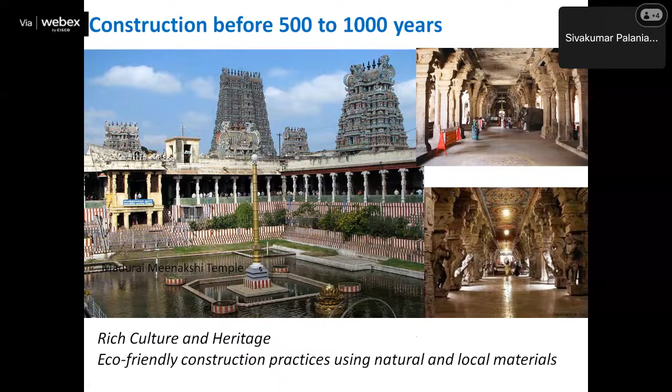Historic temple, Meenakshi temple, and these are other temples in southern Tamil Nadu. These were built using eco-friendly construction practices, using granite stone, more natural and local materials. So this was how the construction industry was long ago, heritage buildings.

Whereas if you consider the traditional housing projects in southern India, you can have a house like this with a central courtyard, which permits ample daylighting and ventilation into the house. There is rainwater harvesting facilitated in the house. So it's more kind of seamlessly living closely with nature in a setup like this.

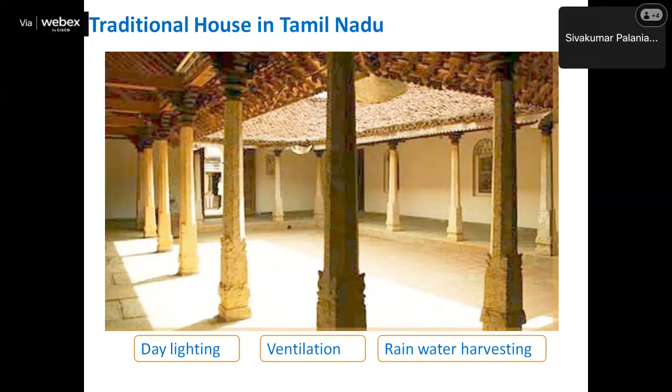Whereas if you consider the modern construction practices, we often go for high-rise residential buildings, commercial buildings, and one of the concerns is we do spend more energy for operating the buildings. Typically, the service life of the built environment is about 50 to 100 years, and a significant amount of energy is used for periodical, day-to-day operation of the building in terms of lighting, ventilation, services,

air conditioning, and so on. So one of the questions I would like to discuss with the audience is how do we align the modern construction practices with the traditional principles and culture, so that we live a more eco-friendly life and reduce the impacts on the ecosystem. This is a question all of us need to think about in the coming years if we really want to move towards net zero.

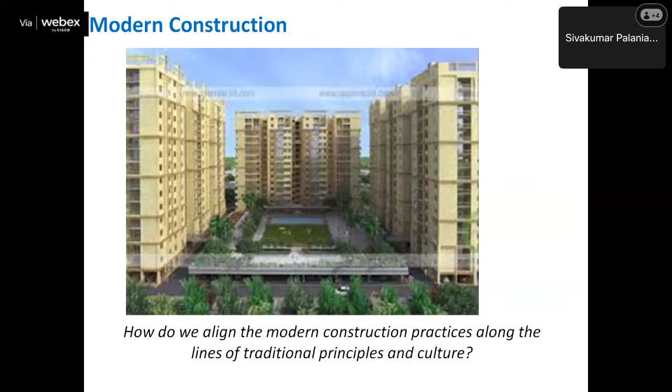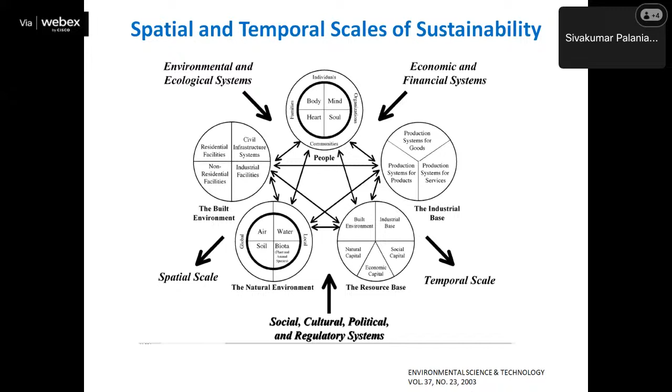Now, there are different perspectives related to sustainability. In addition to the three pillars we have discussed, we do need to consider the temporal dimension. How does sustainability vary across the time scale? We do need to consider the spatial aspects. What is the effect of geographical location on sustainability metrics related to the built environment? So this is relevant for us.

On the global vision for built environment sustainability from a civil engineering perspective, I would like to share two key concepts from this figure. One is how do we move from a non-renewable natural resource to a renewable natural resource? Moving to renewable power sources is very important from a sustainability perspective.

The second is, at the end of life, once a building is demolished, how do we recover useful resources from the built environment and use them for product manufacturing? Thereby we are trying to connect the end of life back to product manufacturing, which will have two benefits. One is we are reducing the amount of waste that goes to landfill. Second is we are reducing the mining operations for new resources. So resource recovery and circular economy along with renewable sources for the built environment will help us move towards net zero goals in the future.

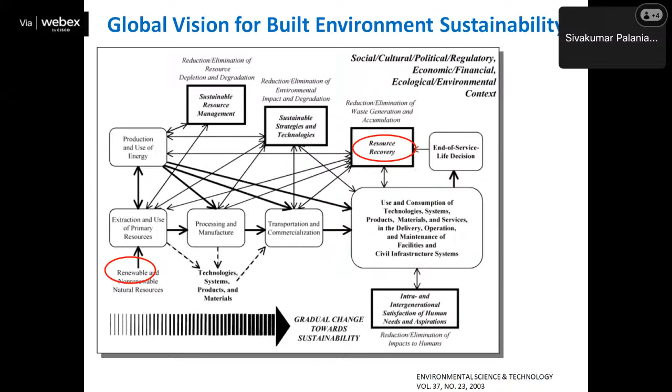I'd like to highlight one example from our own campus, IIT Madras. We have a residential building, a 2-floor building, made of glass fiber reinforced gypsum panels. The GFRG panel is manufactured from gypsum waste produced by the fertilizers industry, and we use that as a useful resource in the built environment. So this is one example of circular economy, where we are trying to connect the waste generated from one sector as a useful resource for another sector. So this is a perfect example.

This photo shows the landfill gypsum waste near the fertilizers industry, and the photo below shows a cross-section of the GFRG panel. As you see here, you have both an interior surface and an exterior surface. In between, you have cavities. These cavities are used either for services, or the alternate cavities are filled with concrete to increase the stability of the GFRG panels.

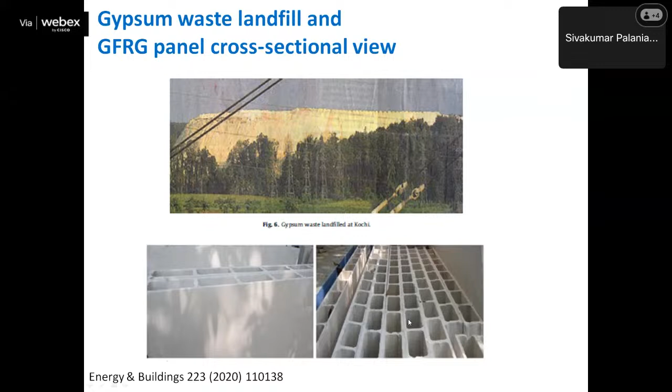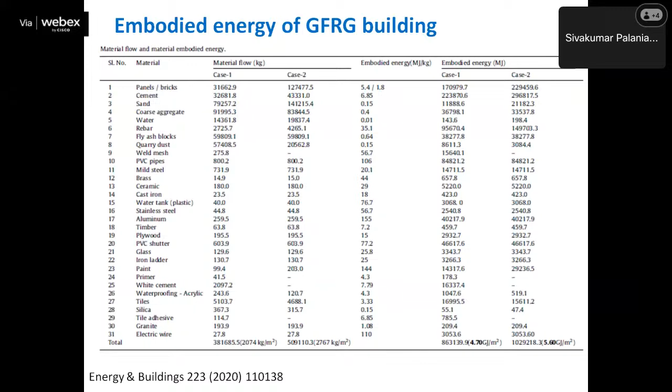In our department, we have conducted several sustainability studies, and one study completed by our former doctoral scholar assessed the embodied energy of conventional residential buildings and GFRG buildings, and compared the differences between both. Here are the key benefits of using this technology for residential buildings. First, we are able to reduce the self-weight by 25%. Cement is reduced by 25%. The use of steel rebar is reduced by 36%. Sand is reduced by 44%. So these are savings from a material perspective.

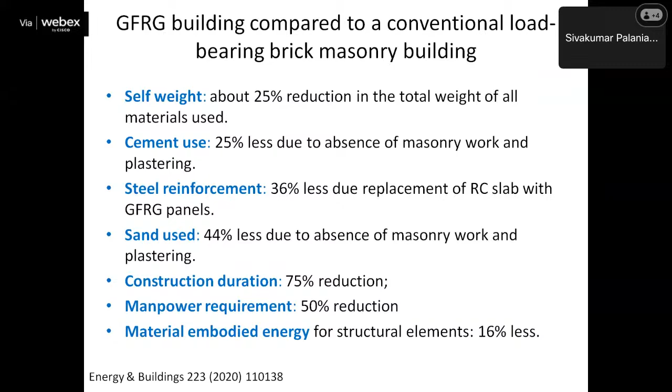In addition, because of the use of prefabricated panels, we are also able to reduce the construction time by 3/4, the workforce requirement by 50%, and there is some reduction in the material embodied energy also. So these are some benefits of prefabricated technology, especially when the prefabricated panels are produced from waste generated by another sector. So this helps us move towards sustainability.

So to summarize, if we want to promote sustainability from a strategic perspective in the built environment, in building planning, design, construction, operation, maintenance, and the end of service life, we have to consider three perspectives. One is what, second is with what, the third is how.

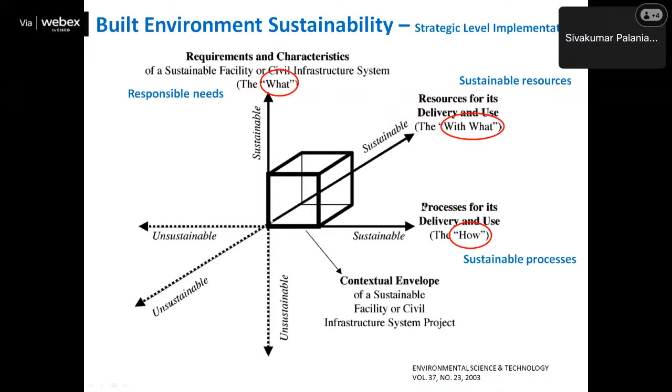First refers to the requirements and functionalities of the new project. So there is an emphasis on making our needs more responsible. Do we have a sustainable requirement for the new facility? Second is with what refers to the use of sustainable resources, how to use materials and technologies with low carbon, low emissions, and low waste. The third is sustainable processes, how to green the construction processes, to reduce the amount of energy used. So this is more sustainability from a strategic perspective.

Now, I would like to give the basics in terms of life cycle energy use in built environment. So a typical building life cycle has these four major phases. First, we consider manufacturing of materials. This is often called A1 to A3 in the international standard. Then follows the construction process at site. So here A4 represents transportation to site, and A5 refers to on-site construction by the contractor.

The third phase is B1 to B7, operation of the facility as well as the maintenance, repair, renovation of the facility. And then finally, we have the demolition and dismantling of the project. This is called C1 to C4, demolition, transport, and landfilling of waste.

So there are different terminologies related to energy consumption in the built environment. The energy used for materials manufacturing is called indirect embodied energy. The energy used for direct construction at project site is called direct embodied energy. The sum of both refers to the initial embodied energy. The energy used for the operation phase is called operating energy, and then the energy used for maintenance and repair is called recurring embodied energy.

So in some buildings, the recurring energy is less than the initial embodied energy, whereas in other types of buildings, the recurring embodied energy is several times higher compared to the initial embodied energy. So this is something to look into from the building planning perspective. The energy used for demolition is called demolition energy.

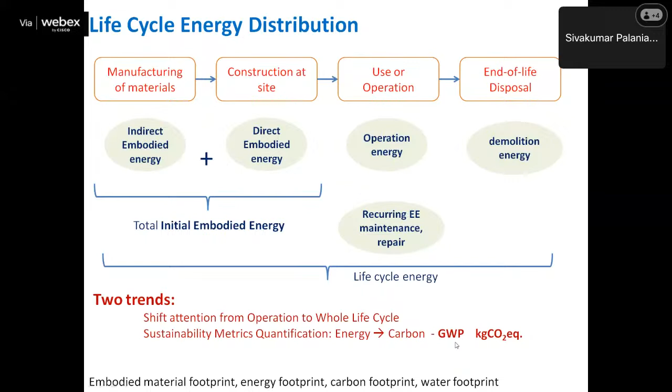So life cycle thinking is very important to promote true sustainability in the society. This calls for considering the entire life cycle of the built environment, starting from the mining of materials, manufacturing, transport, construction, operation and maintenance, repair and renovation, and demolition. And then we do have recycling, which is connected back to the manufacturing.

So to achieve net zero by 2070, as per the government of India, we do need to consider life cycle thinking to understand the true sustainability of new technologies. For example, insulation technologies, solar PV, glazing, EV vehicles, finishing materials, services, envelope and facade. So when we select a new material or a new technology in the context of net zero, it is important to consider the entire life cycle related energy use, emissions, and impacts, so that we make an informed choice in building planning.

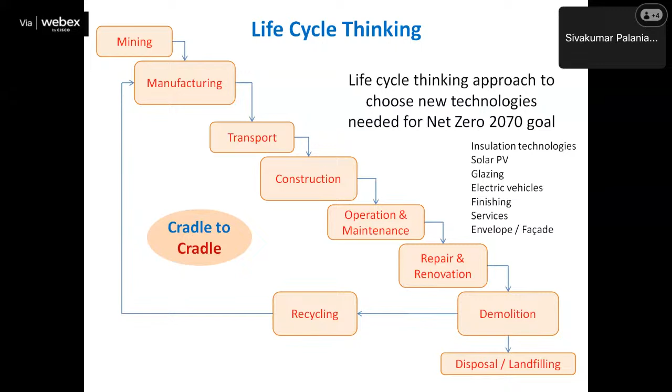Also, the construction industry today is more global in nature compared to earlier days. We do have global construction supply chains where resources are mined from one continent, processed in some other country, and used in developing countries like India. So there is a significant amount of supply chain impact in modern construction practices, especially if you see the mega projects, infrastructure projects, where we have high level of interdependence among multiple stakeholders.

We often import materials, we often import new technologies from Europe and America. So one of the questions we would like to think is, how to optimize the global supply chain related impacts in the context of net zero by 2070.

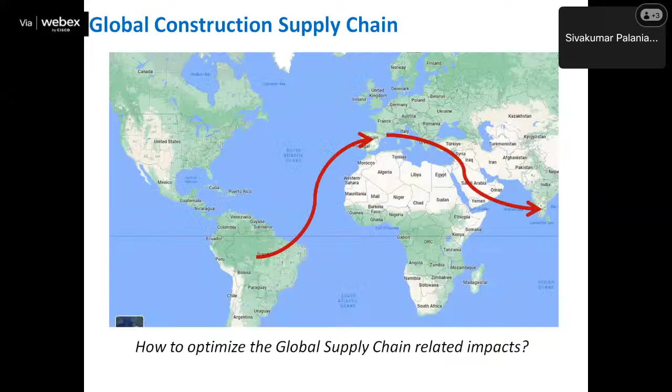The related concept is development of embodied energy databases for developing countries, emerging economies. So this is a snapshot from a database from UK, where they have systematically compiled the embodied energy and embodied carbon of different materials. The availability of reliable data on embodied energy and embodied carbon for materials, technologies, and construction processes is a prerequisite to move towards sustainability. So I'd like to highlight that the technical specifications of materials significantly influence the energy intensity, carbon intensity of new materials.

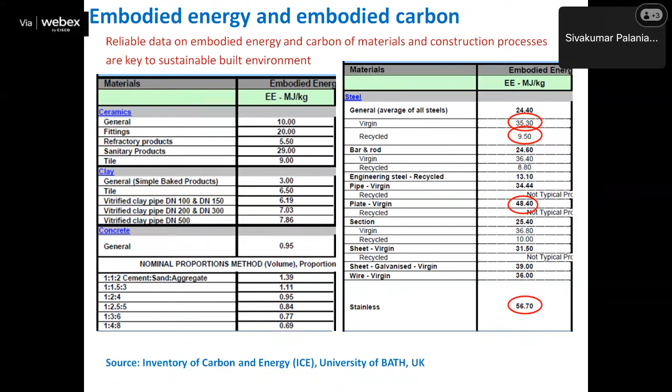So you can see from this snapshot the difference between a recycled material and a new material, for example, stainless steel. The difference is significant. So whether the material is recycled or not has a huge influence on the energy intensity and carbon intensity of the new buildings to be built. The other examples, there are highly energy intensive materials used in built environment.

For example, you have glass, insulation, carpet, lithium. If you see mega projects like airport projects in India, we do use carpet for flooring. So you can see here, carpet is one of the energy intensive materials compared to glass or compared to cement or brick. So this is something we have to consider, how to use less energy intensive materials in the future, especially when we go for mega projects. We have to consciously avoid using energy intensive materials like carpet.

And also we can see lithium is one of the highly energy intensive materials. This is used for EV vehicles, like EV two-wheelers and cars. So we have to pay attention to the energy intensity of batteries, energy intensity of replacing the batteries, and the impacts related to disposal of batteries in the society to promote life cycle thinking.

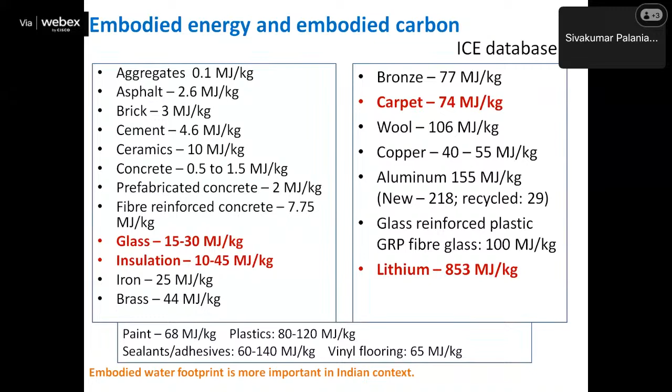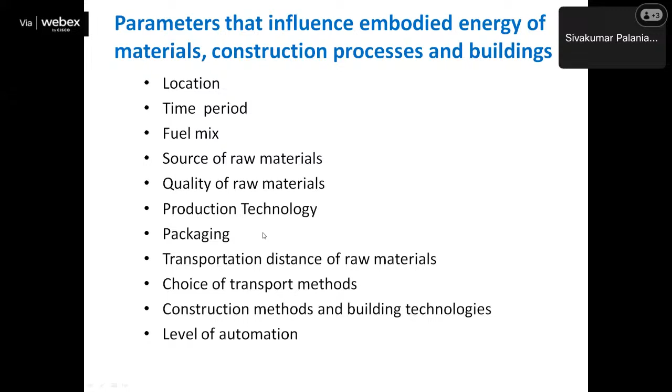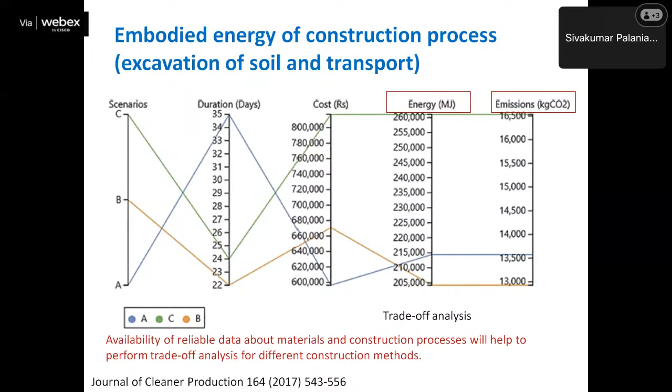So there are different factors influencing the sustainability aspects of built environment. For example, location, time, fuel mix, source of raw materials, quality, technology, packaging. So these factors have to be taken into account when you want to assess sustainability parameters for built environment. We have conducted several studies here at IIT Madras in terms of materials, technologies, and processes. These help us to consider sustainability as a planning parameter in addition to time and cost during building planning.

So I'd like to highlight that there are different stakeholders who are involved in the built environment life cycle. Each stakeholder has different expectations in terms of sustainability. For example, developer may have some other target. Architect may look into sustainability from a different perspective. Academic institutions, research institutions, PMCs, consulting firms, economists, government, clients. So each stakeholder looks into sustainability from a different perspective. It is important to promote true collaboration among all the stakeholders to promote sustainability.

So in this context, I would like to highlight a few recommendations from this Annex 72 committee from International Energy Agency. This committee focused on life cycle impacts of buildings during the last 5 years from 2017 to 2022. And I was fortunate to represent India in this committee and contribute to the development of some technical documents. So I would like to highlight a few important recommendations given by this IEA Annex 72 committee to promote sustainable low carbon built environment in the future.

First, we will look into the role of government and administration. How does the government contribute to promoting net zero? One is, we should define legally binding targets for global warming potential for buildings. Set up a national LCA database in the country so that it is useful for early phases of building planning. The third is how to promote consistency in the LCA database, LCA results in the country. Fourth is set up research programs to develop sustainable materials and sustainable technologies.

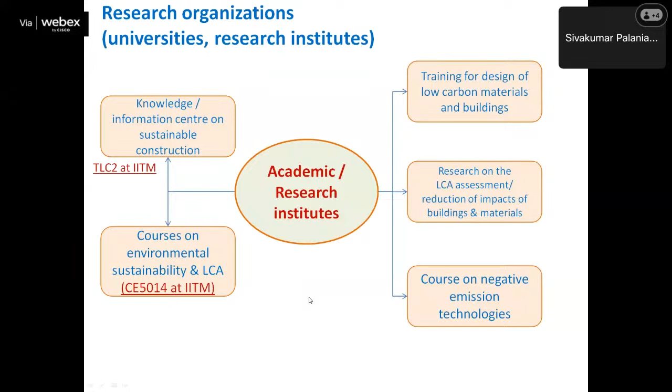The fifth is development of courses related to negative emission technologies in the future. So these are some examples how academic institutions can contribute to move towards low carbon economy.

The third is designers, architects, engineers. So these stakeholders have a very important role to play because they are the ones who develop different types of drawings in the early phases of building planning, architectural drawings, design drawings, finalizing the requirements, finalizing the project budget, and so on. So I have given different examples here.

One is support the client and target setting. How to set the target in terms of functionalities, in terms of the budget, in terms of the resource consumption and global warming potential. Increase the adaptability and longevity of buildings, have long life so that you reduce the waste sent to landfill. Third is develop digital documents related to buildings.

For example, we are talking about material passport, building passport, digital permits. So all the information related to the built environment is available in digital format, which can be used for facilities management. It can be used in the future.

Then encourage evaluating multiple design options using LCA plus BIM. Nowadays, we have many LCA software tools available, which can be integrated with the building information modeling software tools, so that in real time, you can evaluate the environmental impacts of the proposed facility in different stages like LOD 100, 200, 300, and so on. So we strongly need to use digital LCA software tools in the early phases of building planning.

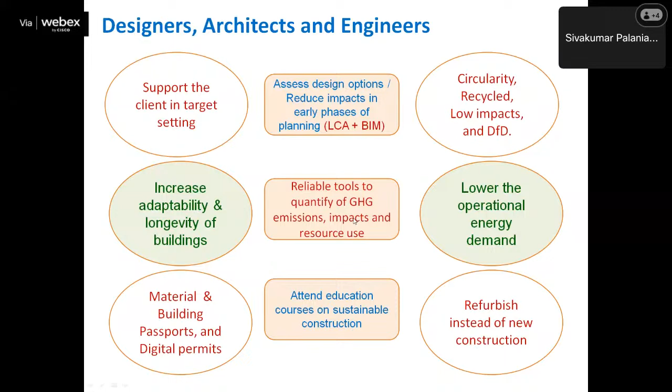Promote circularity, recycled materials, low impact, and promote the concept of design for disassembly. That means how to make buildings more modular so that you can reduce the amount of waste generated in the end of life. How to lower the operating energy demand for the proposed facility. How to promote refurbishment instead of new construction. So these are some ways in which an architect, designer and engineer can influence sustainability in the building planning phase.

Then the role of operators of EPD programs, LCA database providers, and the agencies which provide certification schemes and eco labels for materials. Some examples are given here. For example, follow the international standards used for LCA, use of environmental indicators as per the international standards, ISO standards. Prefer absolute target values instead of using relative values compared to a virtual case.

Introduce a binding target value for life cycle based emissions of buildings. Be cautious in dealing with the environmental credits attributed to the built environment, in particular if it is borrowed from the future generation or from a third party. This is something emphasized as per the policy towards net zero. It will be better to have our own negative emission technology rather than buying an environmental credit from a third party. So that is the key concept here.

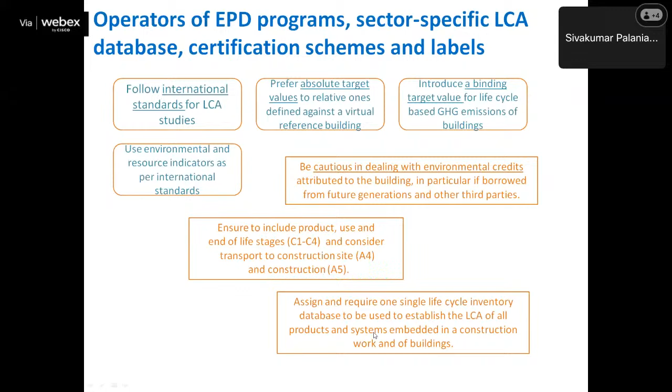Then how to ensure the consideration of product manufacturing phase, operational phase, end of life phases, C1 to C4. Also the transportation to the project site A4 and the construction A5. Thereby, we would like to promote holistic life cycle thinking in evaluating a building option. How to assign and require a single life cycle inventory database to establish LCA for products and systems. These are some examples from the operators of EPD programs.

Then comes the manufacturers. Construction manufacturers play a major role in reducing the energy footprint, carbon footprint of buildings. Some initiatives related to manufacturers are given here. For example, set up a roadmap for net zero from a manufacturing perspective. How to generate environmental LCA data through the EPD programs. This concept of EPD is gaining momentum in India.

Many companies are developing EPD data sheets for materials in consultation with LCA consultants. How to purchase electricity from a renewable resource with guarantee of origin as well as with renewable energy certificate. So this is another example. Reduce environmental impacts, resource use, and global warming potential for all the processes.

How to optimize the supply chain process, with the use of recycled materials, achieving energy efficiency, circularity in the manufacturing phase. The other important aspect is how to bring in suppliers of raw materials to promote the reduction of GWP. So this is a responsibility of the manufacturer. Then following international standards is an important aspect, promoting transparent LCA database so that there is a consistency across all the stakeholders.

The final recommendation is encourage manufacturers to invest in negative emission technology rather than purchasing CO2 emission certificates from a third party, primarily to reduce uncertainty, to reduce future risks related to carbon credits.

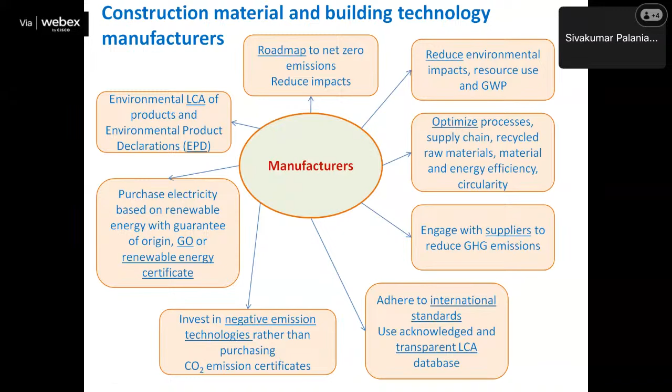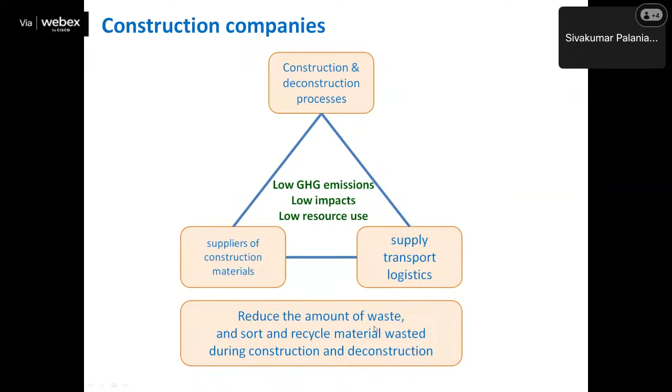Construction companies have to reduce emissions, impacts, and resource use, considering the new construction, deconstruction process, supplies of all the raw materials, and the transport logistics related to construction. They also should focus on controlling the amount of waste generated at the site and recycle the waste at the project site.

Real estate agents have to encourage sharing data on emissions, impacts, and resource use. From the perspective of owners who want to sell the facility, encourage potential buyers to ask for the data and report environmental data for the new development. So basically, we have quantitative data available for new customers, both from the buyer perspective as well as from the seller perspective.

Users and tenants, this is the last stakeholder. What is their role in moving towards net zero? Question your demand, optimize your requirements, use emissions, impacts and resource use as key criteria in selecting buildings, use energy and water economically, use energy carriers that have a low CO2 footprint. So these are some examples.

I thought it would be very useful for you to share from this IEA Annex 72 committee, which was completed recently. Now, I will conclude my presentation in a few minutes with a few examples from India.

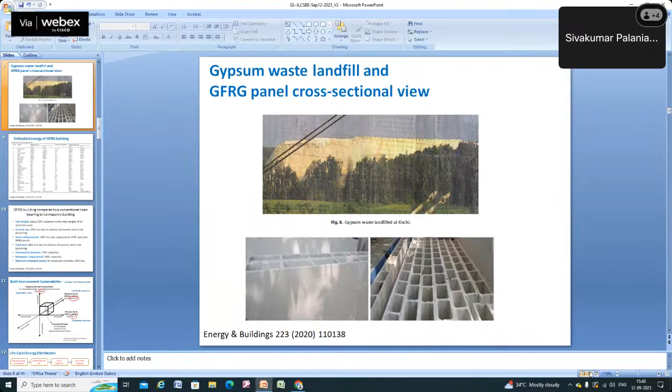Sorry, something is happening. Yeah. Okay, some issue with the system.

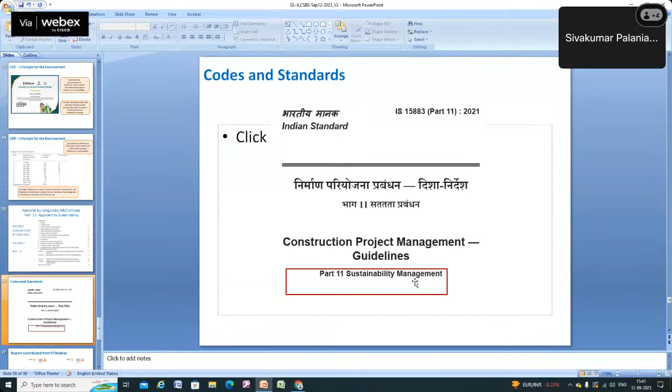Second, we do have several standards available at the national level. For example, National Building Code of India, Part 11, Approach to Sustainability. This will be a very useful resource for all the stakeholders in building planning and building design. Second is Indian Standard 15883 from the Bureau of Indian Standards. This has a specific chapter, Part 11, on sustainability management, more from a construction perspective. This will also be useful for you.

So this is the last one. I'd like to highlight the contribution from IIT Madras towards this Annex 72 committee. We supported development of guidelines for establishing an easy-to-use LCA database in a developing economy. So this was supported from IIT Madras, which will be useful for the future.

And also we have several studies completed here on understanding sustainability parameters in terms of life cycle energy analysis and green buildings. And we have created awareness among the graduate students who are going into industry during the last 10 to 13 years. So I hope this will create a positive impact in society.

So with this, I conclude my talk. The earth has enough resources for our requirement, but not for our greed, as said by Mahatma Gandhi. So thank you very much for your kind attention.

Thank you so much, Mr. Kumar, for this very detailed and very informative presentation. I hope all the people attending this event have really got great insights from your presentation. Five or six key points which Mr. Kumar highlighted are very important. One, he talked about sustainable construction, which is going local with local resources, which is a need of ours. Then he talked about our legacy of old-age architecture, which we need to adopt in this modern era.

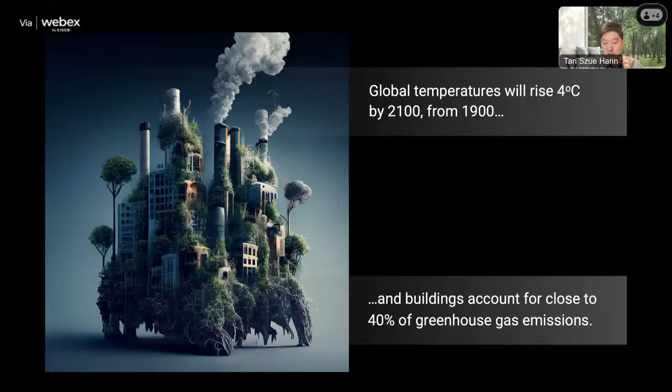But first up, we all know, of course, in the built environment industry that global temperatures will rise up to 4 degrees or even more by 2100 from pre-industrial levels in 1900. And buildings account for close to 40% of greenhouse gas emissions. And if we're talking about developing and rapidly urbanizing Asia, this figure could actually be higher, up to about 50%. And as a result of the UN, I believe it was COP21 back then, the Sustainable Development Goals were actually developed, out of which the organization I'm working with, CAPL, we have agency in about 10 out of 17 of these goals.

So, for instance, if we're in the real estate business, good health and certainly clean water and sanitation would be enabled by our business. Likewise, with sustainable cities and communities, of course, with climate action. We don't basically venture to, for example, solve other things like the hunger issue and so on, although, of course, there are many industries out there that can do that. What we can do, however, we do within our control, and we do try to minimize as much as possible.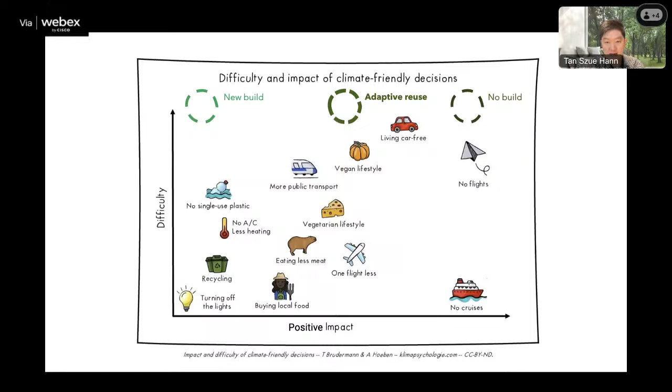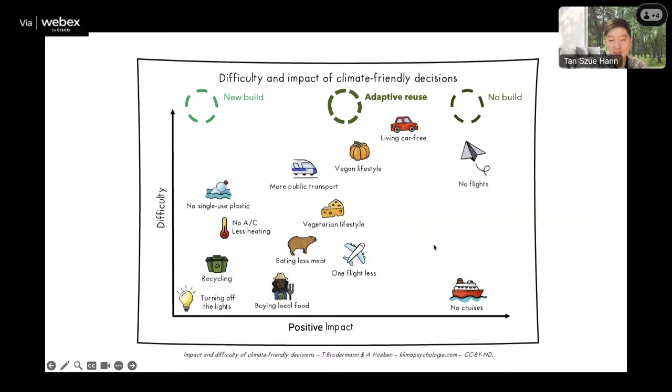But when you talk about the building industry, a new build has a minimum positive impact, adaptive reuse somewhere in between. Of course, you're taking existing embodied carbon, you're keeping it, and you're upgrading the building. And the no build option has the most positive effect. However, this is the World Green Building Week, and if we're talking about the no build option, more than half of us in this room or in this virtual room will be out of a job. So that's no question. And indeed, we need to upgrade our environments in order to make them attractive, livable, and adaptable for modern living.

So, what is Keppel doing about sustainability? Just a quick introduction to the company. Traditionally, we're more than 50 years old. We've been in the shipyard as well as the development business. At some point, we were one of the corporates in Singapore that actually owned a bank. Now we've moved on to a fund management and investment company that looks at up to 200 billion of funds under management by 2030. And as at June 2023, we had funds under management of about 53.2 billion Sing dollars. That's more than 40 billion US dollars.

Out of which 62% is actually in real estate, which is why we are focused heavily on promoting sustainable real estate through real practice and through real measurements. And that is through infrastructure, real estate, as well as connectivity. And in doing so, if we go from a traditional build, develop and sell model into one that's asset light, that's also one way of saving our carbon emissions.

And in realizing our decarbonization vision, what we're trying to do is to take a science-based approach through our science-based targets initiative and look at refocusing our portfolio on urban solutions, investing in sustainability-related innovation on renewables as well, and also design a lower footprint type of built environment. And this is basically done through an ecosystem of different solutions providers, including energy as a service, and that's where we pay upfront for your energy capital expenditures.

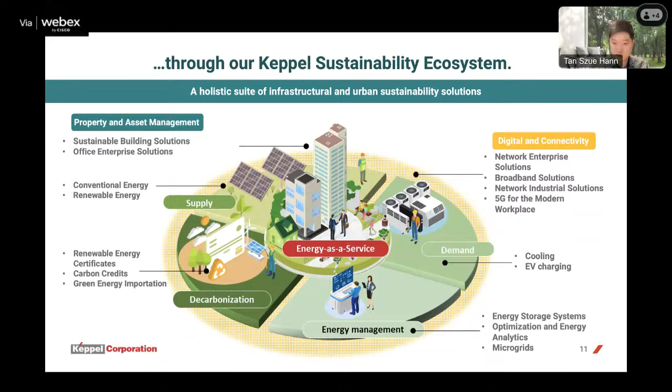For example, a new chiller system that's more efficient, and over time you can pay us back like an installment plan. And also, for instance, the generation of renewables as well as energy management solutions. Now, that's the business pitch side of things. We want to talk a bit more about how we're actually decarbonizing.

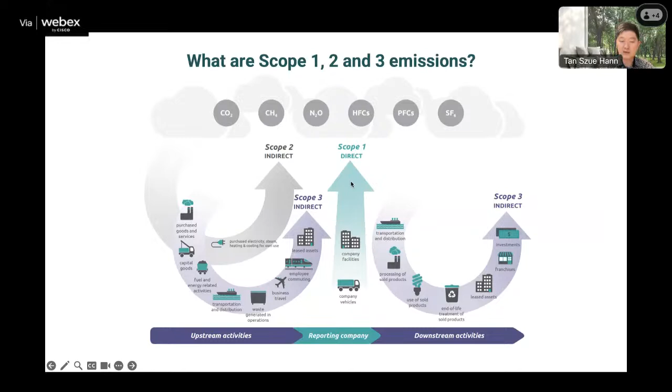So, of course, not to turn this into a lecture, but Scope 1 and 2 basically are direct and indirect emissions, resulting in this case from your company building itself as well as your vehicles, and Scope 2 resulting from energy that you consume, for instance, from the grid.

So once again, reducing Scope 1 and 2 through retrofitting rather than rebuilding, through going for low carbon and low consumption building materials as well as vehicles, electric vehicles, for instance, and for electricity supply, reducing our consumption through more efficient systems.

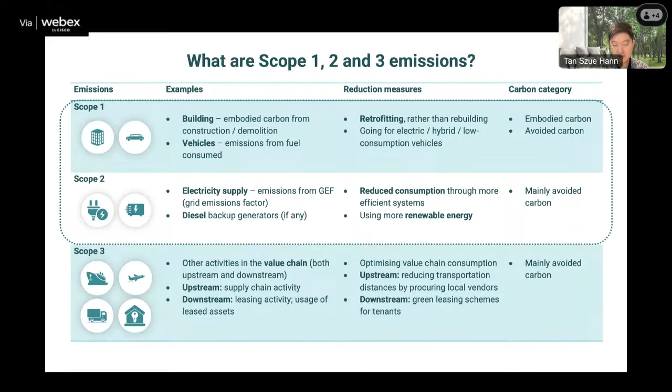We are also starting our voluntary reporting on Scope 3, and that's supply chain, which the previous speaker also mentioned. And I think the value and supply chain needs to be optimized in terms of carbon output as well as emissions.

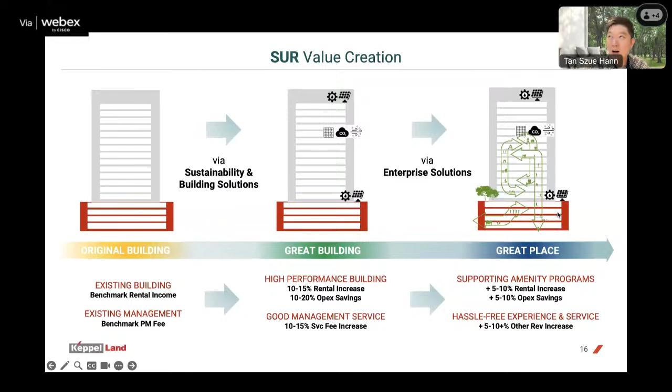Which leads me to sustainable urban renewal, which is our endeavor of turning an existing building into a great building through sustainability solutions and into a great place with what we call our enterprise solutions. These enterprise solutions could be the provision of amenities like flex spaces, shared spaces, and also providing common programming where during every festival, the different tenants of the building could come together.

And we've got projects in the following markets. We've got projects in China, in India as well, in the cities of Bangalore as well as Pune, and also prospects in Mumbai. We're also looking at assets in Singapore and South Korea with a possible expansion into other Asia-Pacific markets.

And how we perform this is through a stepwise approach. First of all, you have the base, which is renovation versus rebuild. Then there's the facade improvement, the energy improvement through your mechanical systems, your energy regain through renewables, energy optimization through lighting, water savings, as well as other building solutions and controls.

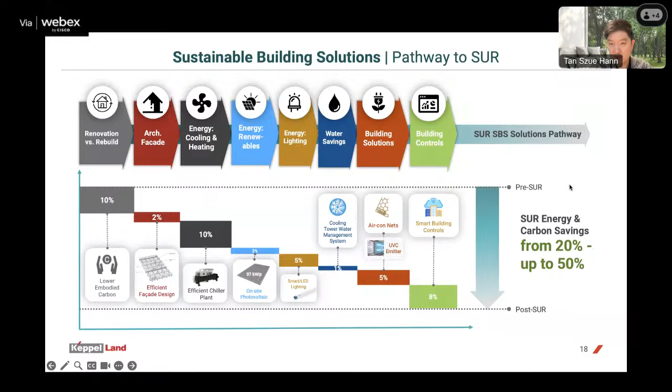And if you cascade all of these savings, you could save both energy and carbon from about 20 to 50%. And if you turn that into a monetary equation, you could be saving more than $1 million US per asset every year, which works out towards a higher net operating income as well. These are kit of parts, so these are existing solutions.

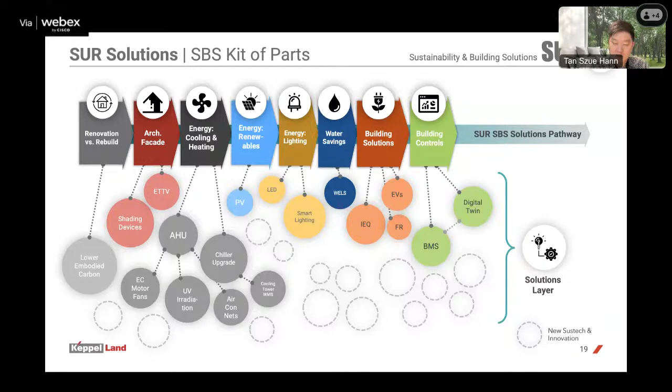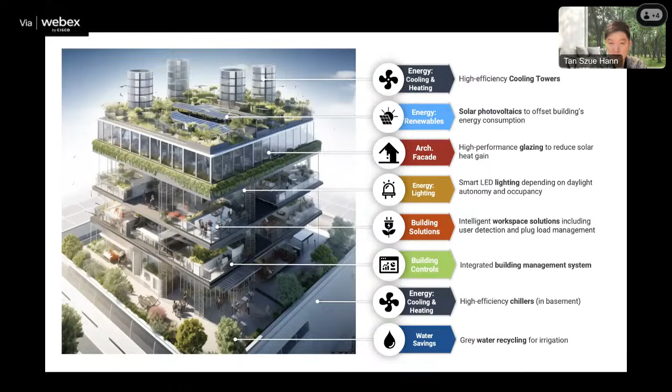You also see these bubbles that are dotted in white. These are solutions that we constantly look out for and try to prospect, and these new prospective solutions are part of our global SUR solutions ecosystem. And when you apply that onto a nominal building, you've got a whole series of different solutions that not only work, but also work well with one another.

And on the enterprise solutions part, it's basically an integration of customer experience as well as app-based strategies. So you've got your apps to, for example, book your meeting rooms, book the commons facilities, as well as to detect how the performance of a building will be. So it combines both customer experience and sustainability.

And one of the examples of us applying this project is an asset in Seoul, the capital of South Korea. It's a 40-year-old building that immediately faces the traditional royal palace. So it's in a very good site, nice location, on the fringes of the central business district.

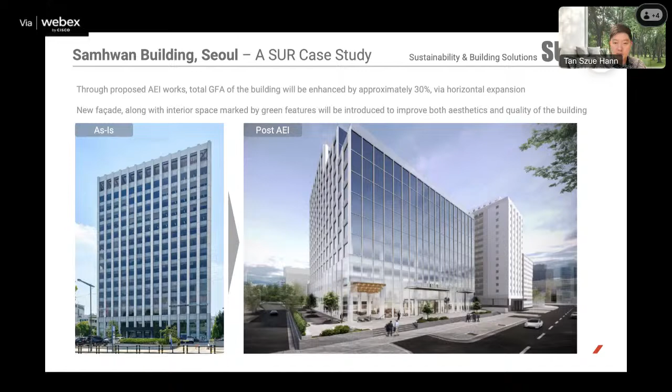And we're turning the building around by expanding its GFA, by maximizing its potential, but also keeping as much structure as possible. And if we map the decarbonization pathway through the Carbon Risk Real Estate Monitor, or the CRREM pathway, we're looking at where the asset is right now and where it needs to be at 2050, which is that green sloping line that you see.

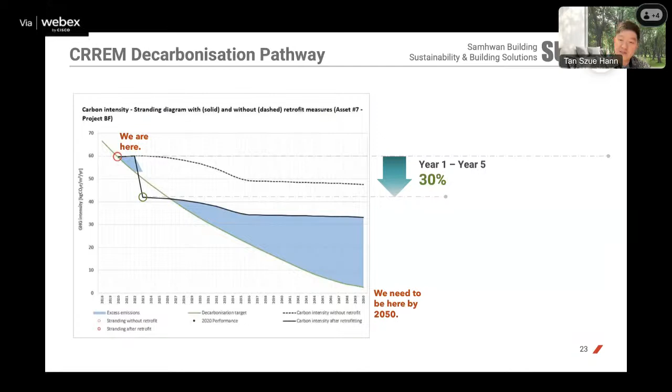So the first tranche of activity can happen within the first 5 years, and that's basically taking a suite of energy saving solutions.

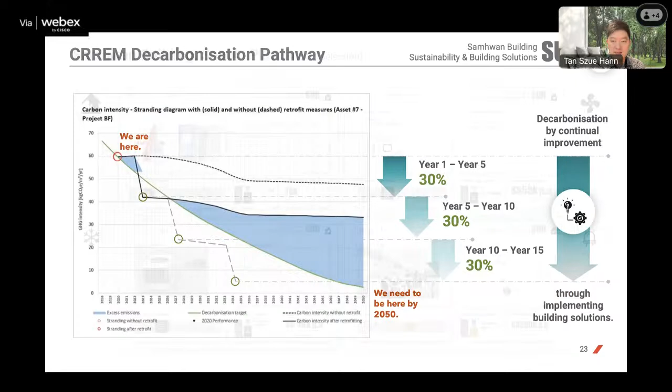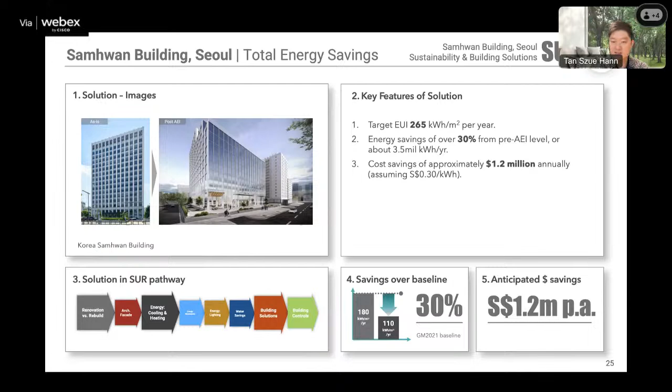Likewise, in the subsequent tranches, by continual improvement through implementing building solutions. And these are the different approaches that we take: facade, ventilation, cooling, and so on. Basically, these are what we call our play cards in order to achieve these energy savings. Collectively, you'll save about 30% over the baseline, with more than 1.2 million Singapore dollars per annum of savings.

Closer to home, or our home in this case, this is the building in which Keppel is housed. It's our headquarters. It's a 21-year-old building that, through these solutions, not just architecture, but also in terms of mechanical and engineering, as well as digital solutions, we've managed to save quite a bit of its consumption. Exactly how much, I'll share with you a bit more, but on the left are images that were pre-2019, before its renovation, and on the right, post-2019, which is where we are today.

Right, so the lobby has been upgraded to match, I would say, more recent trends in architectural design as well as interior design. And in this case, we've got our level 2 business lounge, where different business units can actually book their meetings, and where the Keppel group comes together for their meetings as well. With lighting savings, we've had an intelligent lighting solution that led to 70% lighting savings over traditional T5s, and the payback with a government grant was less than 3 years.

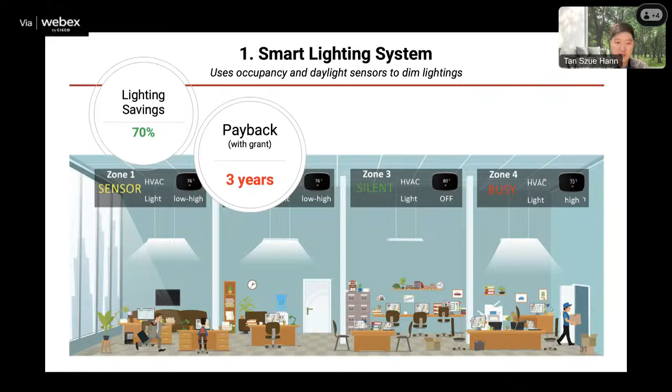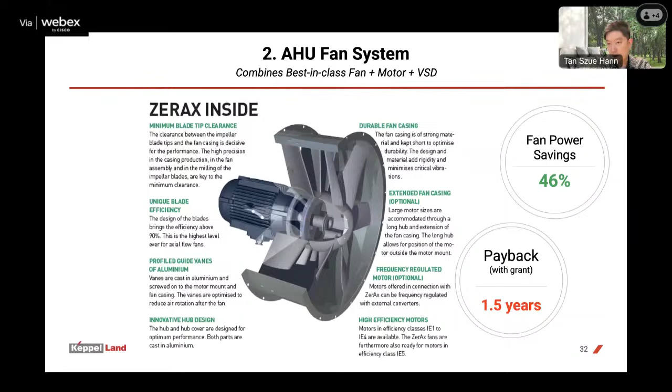We've also introduced an air handling unit fan system, which, by virtue of the blade design and the fact that it's electronically commutated, meaning there's no friction, there's also some energy savings to be had. So up to a fan power savings of about 46% with a 1.5-year payback. We've also introduced a cooling tower water management system, and this is a chemical treatment system that decalcifies the calcium buildup that you would find in the pipes of the water that is transferred within a cooling tower type of system. So in doing so, you're getting both an air conditioning and a water savings that's quite significant, and again, with a relatively short payback.

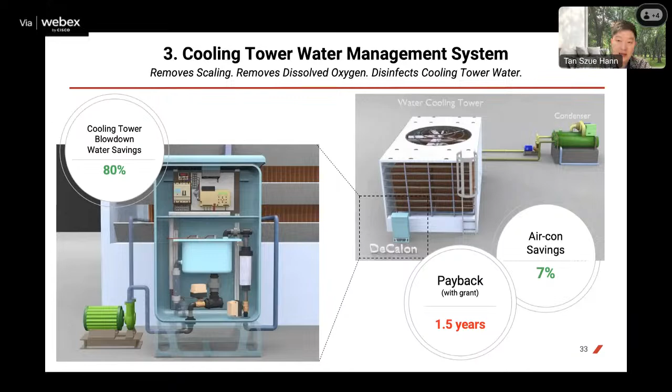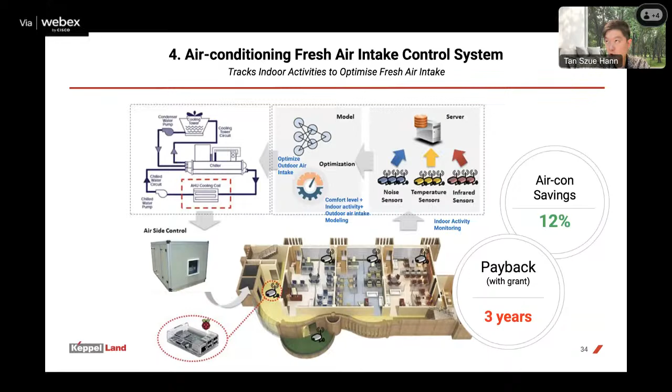And we have a fresh air intake control system as well, which detects through noise, temperature, as well as infrared, the level of occupancy within a room, and it therefore kicks in the fresh air intake, therefore maintaining indoor air quality, but also significantly reducing the consumption within the fresh air intake, right? So you're not taking in fresh air when you don't actually need it. And finally, all the systems are wired together with an intelligent building control system, which again is like an intelligent BMS, and that leads to more savings as well.

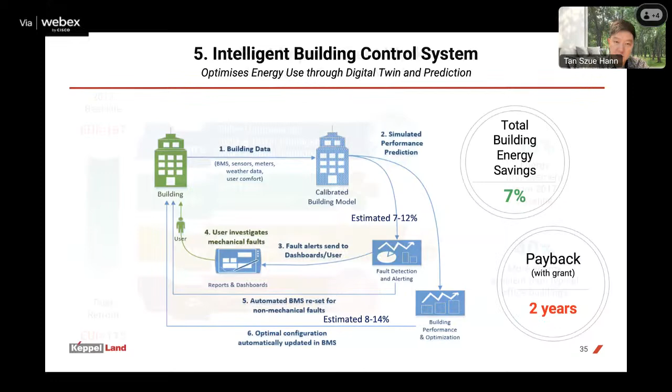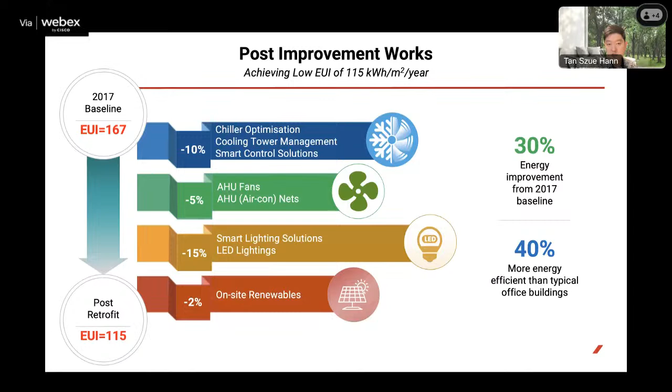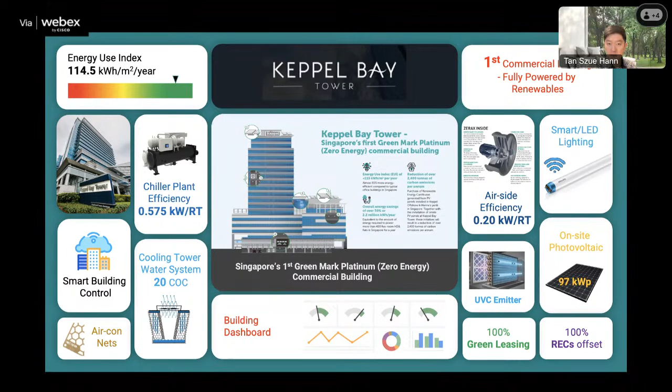So with all this, we've taken down the energy usage intensity from 167 to 115. That includes also chiller optimization, AHU fans, the lighting that I talked about, as well as on-site renewables. And this is the list or the greatest hits of all the solutions that we applied in this building, with the sheer focus of making it a net zero building.

So the case for sustainable buildings really is that even though there's CapEx, you do get your payback within a short amount of time. So as an owner-operator, it makes sense. Even as an investment, it makes sense. Just for the landlord spaces alone, we saved about $400,000 per year; including the tenancy spaces, the collective savings is more than 1 million. And of course, there's improved indoor environmental quality and an uplift in building value.

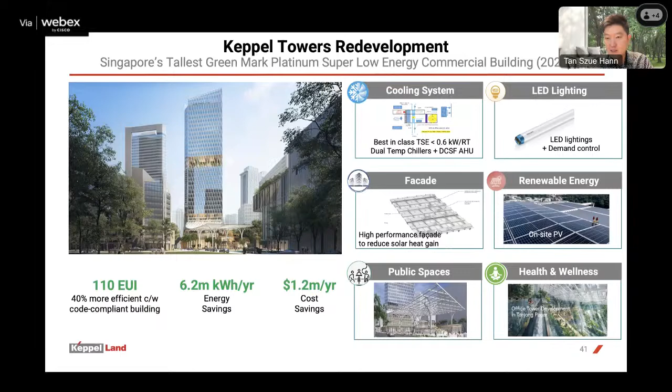And this continues into a redevelopment project that we're doing. This is a 33-story building in downtown Singapore, smack in the middle of the heart of the city. And in this case, we're also looking at an even lower EUI, or energy use intensity, of 110 compared to the previous 115. So this being a redevelopment, we've got more opportunity to upgrade the systems even further. This is how the building looks. It's 33 stories with various amenities. In this case, you've got open spaces.

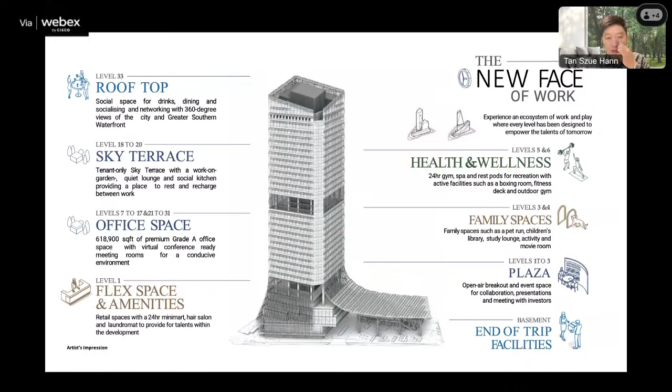You've also got this veil that hides what is a POPS, a privately owned public space. And it's sort of a deal between private developers and the government to actually create open urban spaces and have the private sector, in this case the development, actually pay for it. But what it does, it brings in the community. It brings in both the tenants of the building, as well as the surrounding community, towards your building.

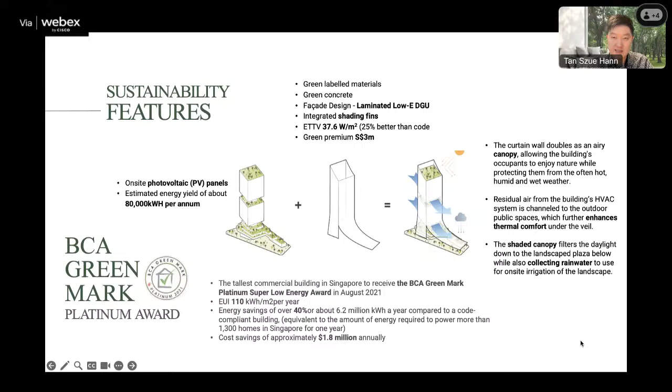So with a veil, or a more sustainable facade system through its envelope thermal transfer value that's fairly low, and also through relevant screening, we've I think created a first line of defense for the building. And this is the public space that I was talking about, right?

So you can have all sorts of activity, from spin classes to yoga to high intensity training classes that young people are engaged in these days. At the workstation level, you've got various amenities. So you've got facial recognition that recognizes, in this case, you being an occupant of the building. You come in, you're led to the room that you booked for the day, for instance, if it's a hot desking environment. And even within your own workstation, you've got efficient user control air conditioning, as well as indoor air quality and indoor lighting quality management types of solutions.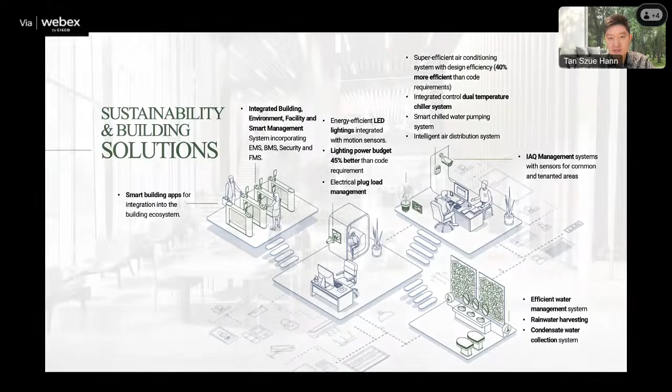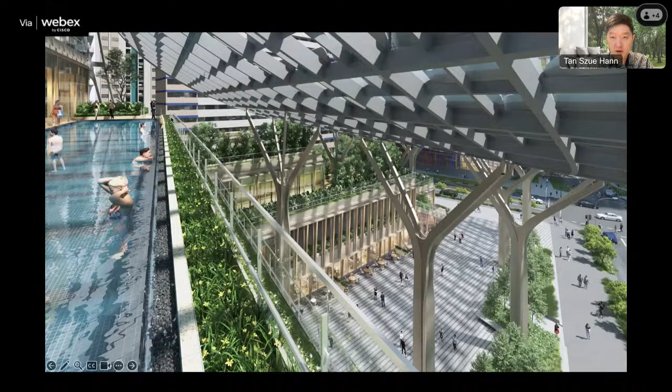And as you're working, for example, in this environment, this is a lounge that continues with the same connectivity all the way to your work desk as well. Here's a little pool. Well, it's not very little. It's a fairly large swimming pool for the tenants and occupants of the building as well, that looks down onto restaurants and the public spaces below.

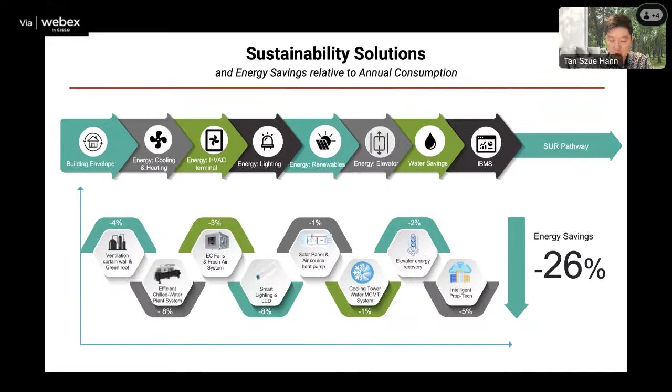And finally, a project here in China that, again, is part of the new Park Avenue Central District. Through the application of similar technologies, we've got 18 sustainability solutions, and we've actually reduced the energy consumption by more than 25% compared to a benchmark building in China. Likewise, with a similar strategy. And what you see here is IBMS, the intelligent building management system that through AI actually detects your consumption and preempts against any failures accordingly.

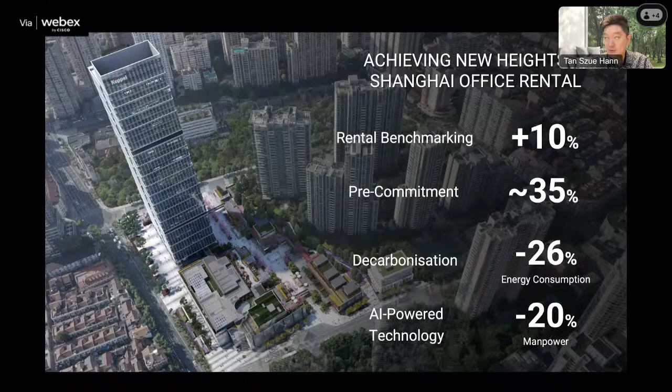So we've seen good rental benchmarking with pre-commitments, basically indicating that the market really is focused more towards green buildings, more towards decarbonization, as well as the embracing of artificial intelligence. And I'll leave you with some images of this building that's going to be completed at about this time in 2024, next year. So, SUR, or Sustainable Urban Renewal, creates greener, healthier, and indeed better spaces.

But I'm just going to leave you with a few quick images of what we call our nearshore township, which is a floating structure that we're designing off the coast of Singapore. So when we talk about net zero, it's also about resilience. It's also about retaining the use and function of our island of Singapore, and therefore protecting our coasts.

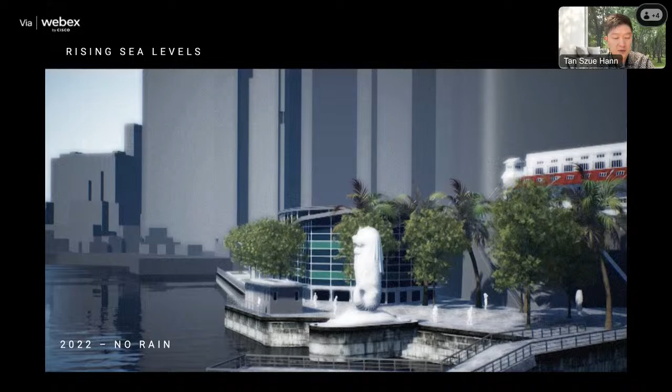So last year, if there's no rain, this is what the popular Merlion in Singapore would look like. If there's flash floods, this is what it might look like. And by the end of the century, this is what it might look like. So the creature might actually have a chance to finally swim. But these are various modes of adapting to climate change from all around the world. Typically, you will build bunds, you will build seawalls, and so on.

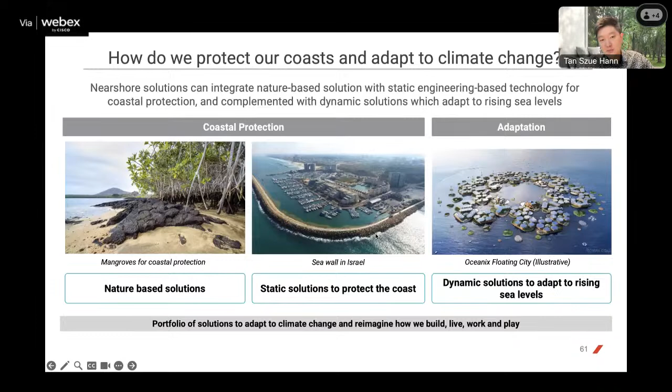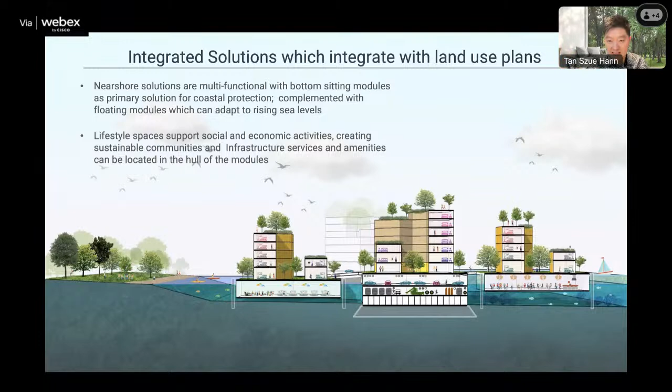What we're also trying to do is to engage with nature-based solutions and the creation of a floating structure. So how do we do that? By going offshore or close to the shore and creating a bottom-sitting environment and allowing floating structures to be attached to it. And because they're attached and bound together by a hexagonal lattice, they tend to be quite rigid and robust in structure.

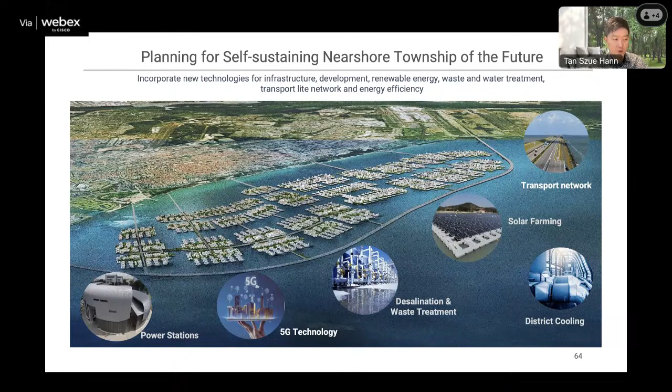And of course, this development would then be low waste, low emissions, with as much circularity as possible, and also the ability to self-sufficiently supply its own power through both renewables as well as power that's off the grid, including district cooling solutions that would be cooled by the sea and also enable the developments to be collectively cooled through a larger infrastructure.

Right, so the proposition creates multiple new forms of real estate. It could be experimental. It could also introduce a new lifestyle environment, with recreation, schools, living, labs, campuses, and so on, that you could actually modulate within such an environment. And that's our solution for climate resilience.

So in Singapore, there's the Singapore Green Plan that was introduced a couple of years ago that leads us towards a resilient future. I think we're very much aligned with the World Green Building goals, as well as the Indian Green Building Council goals in terms of decarbonization.